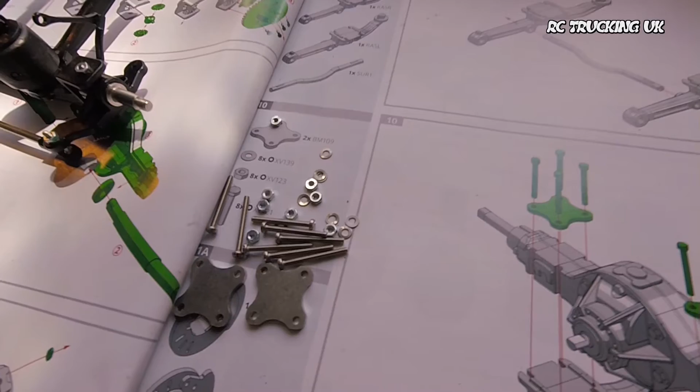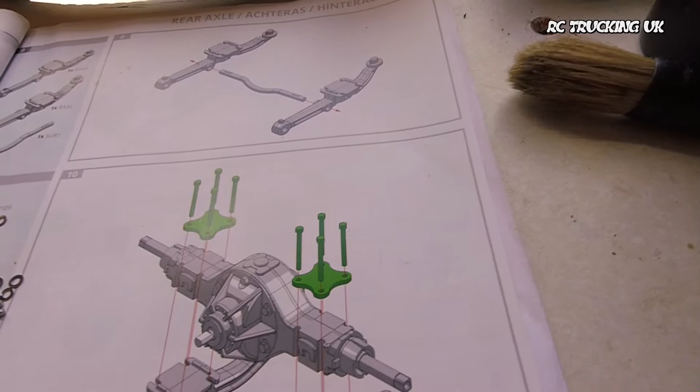So for this one, going off the manual, just make sure that you've got everything the correct way around. And I've got all my little bits and bobs out, screws that I'm going to be needing for this step, and there's no gluing or anything. As I say, once we've got those arms together, it's just a case of clamping this axle basically down onto those arms, and then we'll come down to step 11 in the next video.

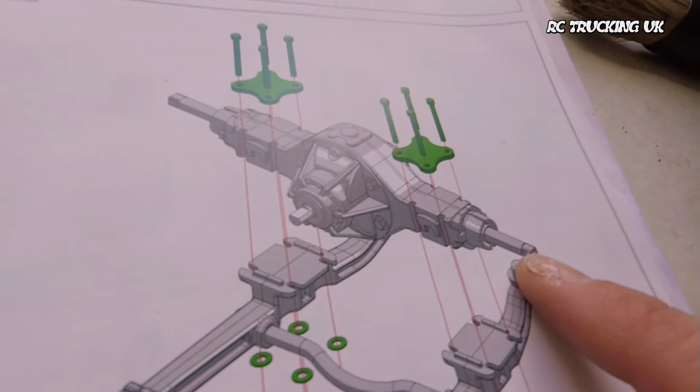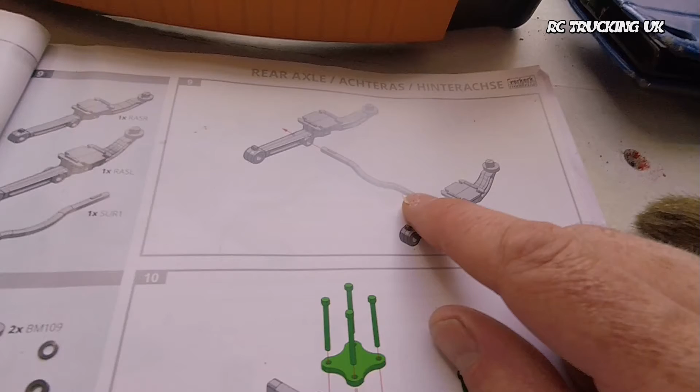Starting with which will be the left or right side, because I don't know which way it'll be in the end. Right, so that will be the right side of the truck, and looking at that, that's going to slot into here that way, keeping the arc towards the front of the truck. As I said, looking at where the prop's going, that's going to be the rear, and that will be the front, so just make sure that the arc is to the front. And if you look up here, you'll notice there are some little pips, so I'll keep them to the top when slotting them in there, and I'm presuming they're just going to click into place. Yeah, they kind of don't click click, but you do feel them slotting. So that's all step 9 is.

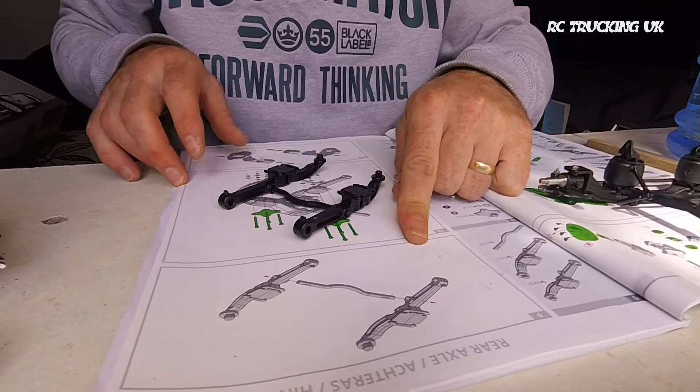So now it's just a case of clamping the axle, keeping that pip, remember the little bit from yesterday's episode, keeping that to the top, so that's going to sit on the axle there. Now, like with the Tamiya, there's grooves cut out for the 4 nuts and bolts and washers on each arm there, and same on the axle, where they'll just slot in down the sides. So just copying off this basically. Put that there like that, then you know it's the correct way around. And so we're just going to slot that onto there.

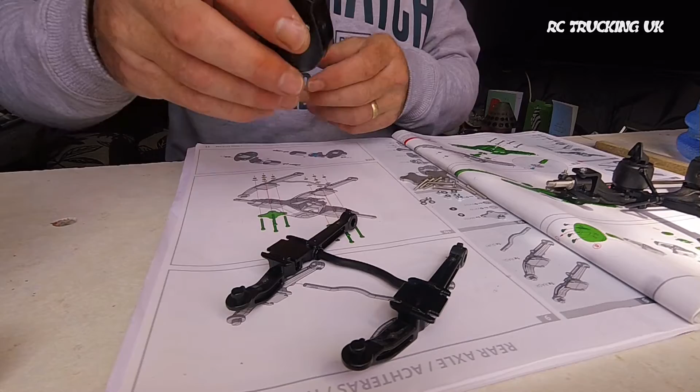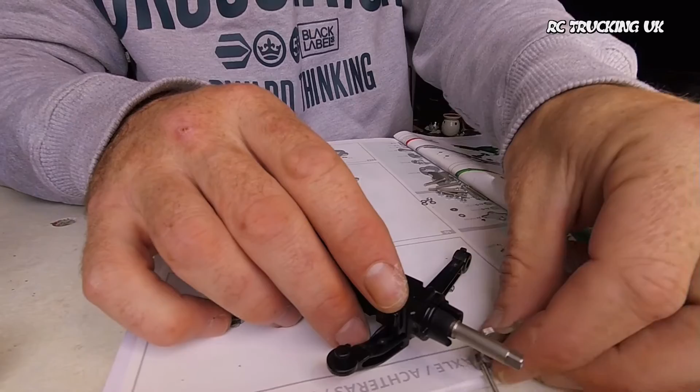One of these clamps will be going on the top. Now then, the bolt goes through first and then the washer on this one. So we'll pop - let me get a flat head, just so I'm a little more prepared. Alright. Fiddly again, guys, fiddly again.

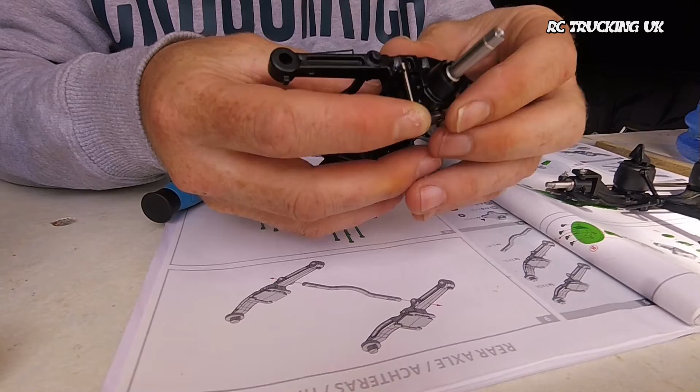It's a good job I'm pretty patient. Well, this would have been through the window by now.

I'll just get that upside down where I can pop one of these microscopic washers on there, and a little nut. There we go.

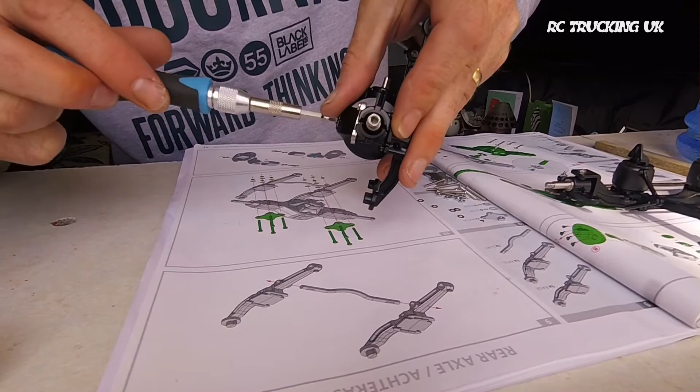Now once the first one's in and it's held in, that's a big help, just getting it all in place. For now it's just make sure it's all lined up. I'm not doing too bad today with this, and it's a smaller flathead than yesterday and a bigger head on the screw.

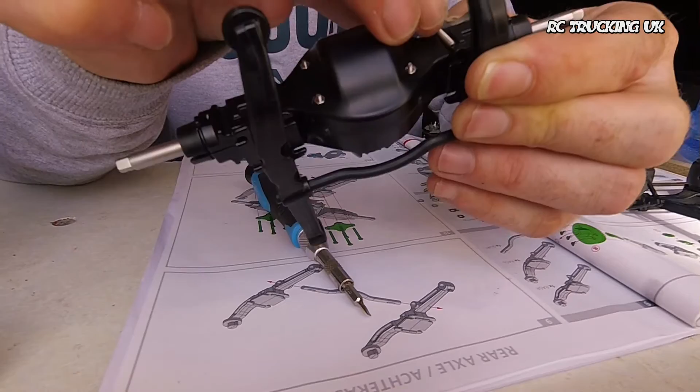Cracking job, Scotty. Second one, I'm just going to go in the opposite corner as I just did then, and then that should hopefully hold that one into place.

Believe me, this is fiddly. Now I might be wise getting a little clamp set out to hold some of this stuff if it's going to be like this quite regular throughout the build. Just then I get use of both of my hands, or even maybe some little tweezers.

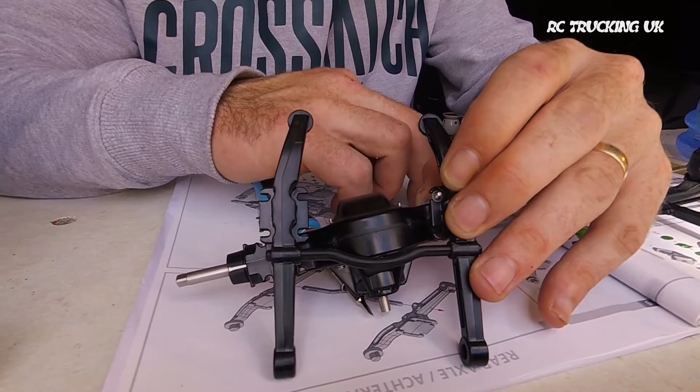I'm sorry if some of this is just coming off camera. I'm more concentrating on trying to get these nuts on than looking at where I'm holding this to be on camera, if that makes any sense. I am just struggling, to be honest with you.

Now it's just find a little socket which is going to fit these. So I thought this was going to be a quick and easy one. There we go, that'll help just to tighten them all up in a minute. But it's held in place there for now, which is what I'm after.

So now you have the idea of what I'm doing there and just screwing them up. You really don't need to see me struggle for the rest of these, that's probably been quite painful enough watching that. So I'm just going to go ahead now and complete the other two, finish that side off camera, and then we'll come back and have a little look at the progress. So I shall catch you guys in a moment.

So for the little fiddly ones, like the washers going on this, especially if you've got quite big fingers and stuff, it's going to be a struggle. So all I've got here is some long reach pliers just to get the little washers, so I can get it into there where I need to be. Otherwise it's like being at a fairground trying to chuck hoops on and win a teddy, and I'm getting absolutely nowhere. I'm not winning no teddies or anything.

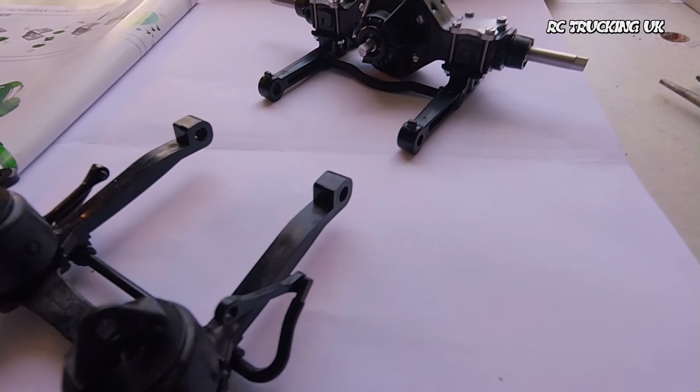So that is the rear axle, and next we're going to be coming on to doing the brake discs and things like that.

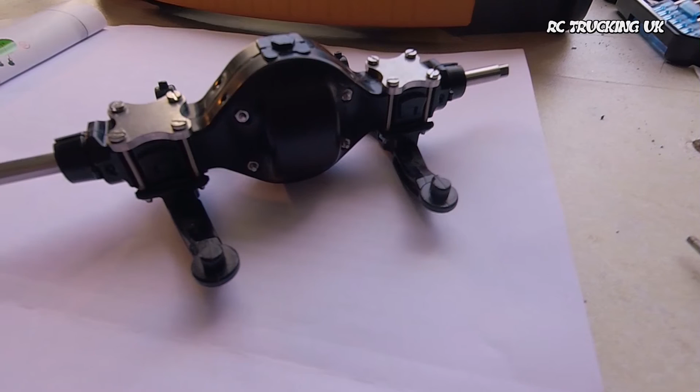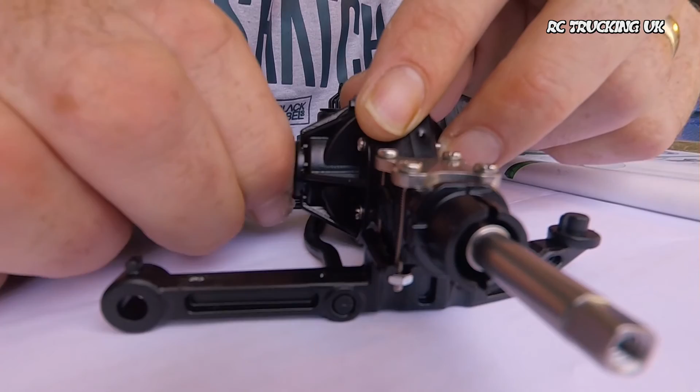So it's all mechanically working fine, it's all greased up in there, everything's spot on, and yeah, next one, brake disc. So we'll do that in the next episode, and we'll do 11B also, which is fitting them, and then we're going to build up the rear airbags.